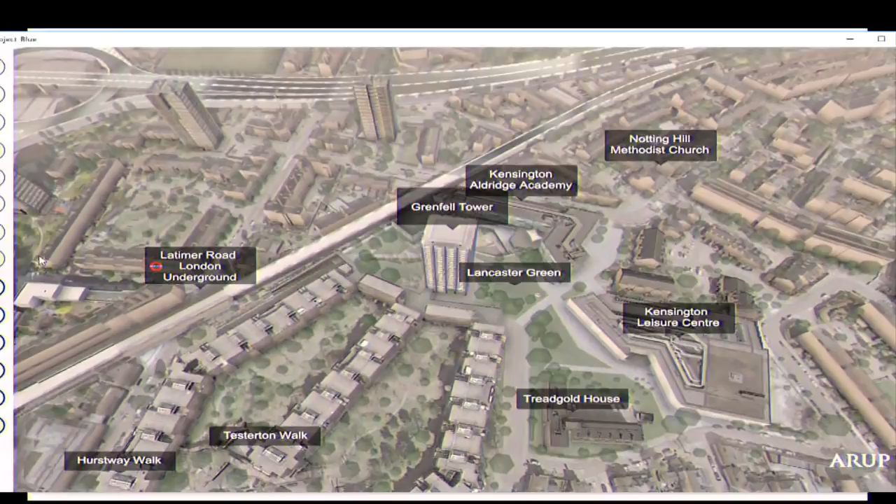That is a plan view of the locality, and just pausing there, you can see Grenfell Tower in the middle, with, to the south, three walkways, and if you start to rotate to the east, you can see Hurstway Walk to the west, Testerton Walk in the middle, and there, just coming into view to the east, is the third walkway, Barandon Walk. The name is just appearing. To the east, we have Treadgold House, sitting on the east side of Grenfell Road, and to the northeast of that, you see there the Kensington Leisure Centre.

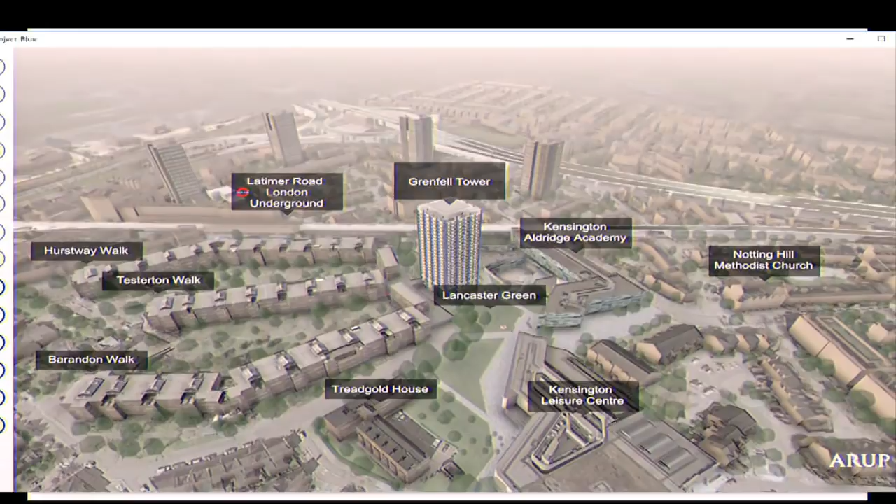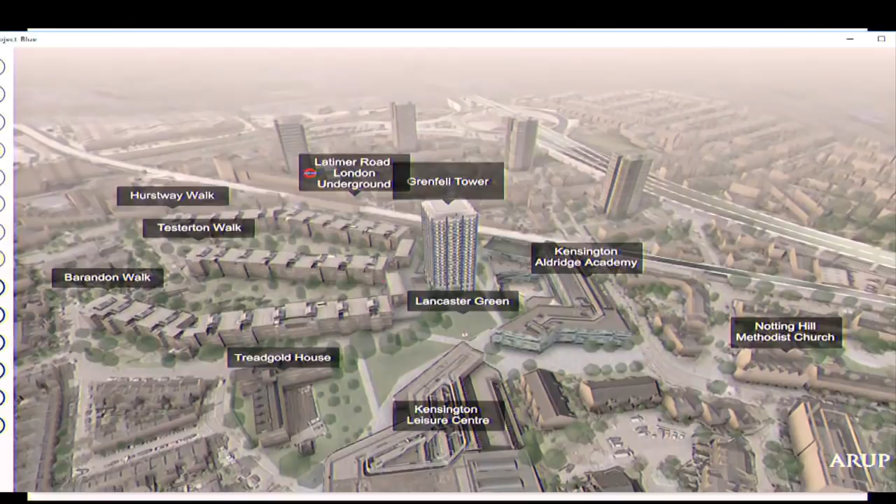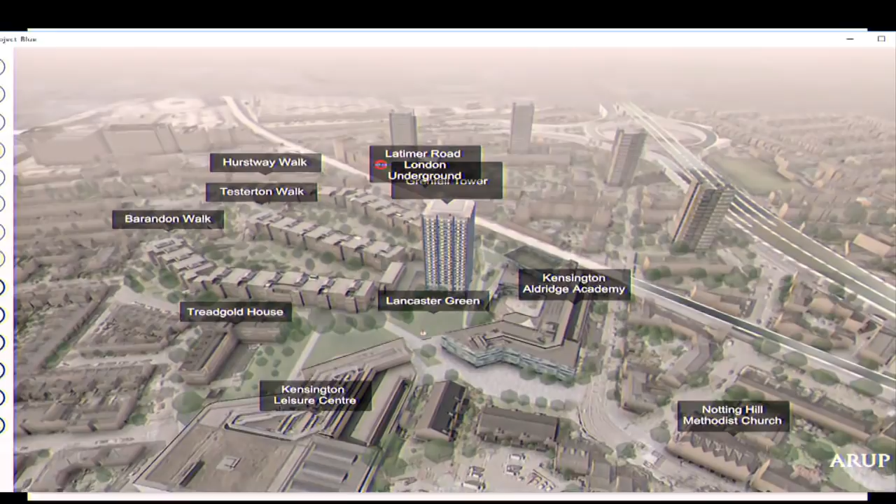To the northwest of that, running from the east, not to the northeast of the building, and running to the northeast, is Kensington Aldridge Academy. And to the immediate east of the building, we have Lancaster Green. You could see the A40 running away there to the west, and the London Tube line with Latimer Road Station to the southwest of the building.

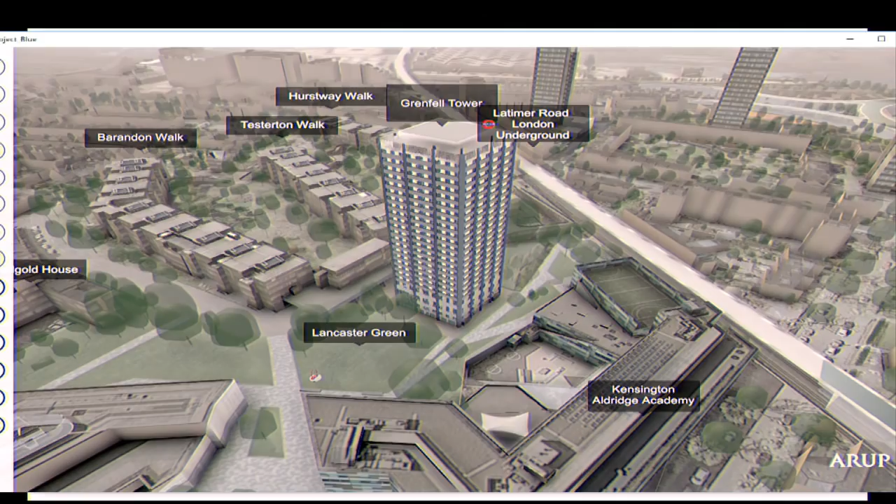If we just pause there, you can see that we're looking at the east face and the north face, and Lancaster Green lies immediately to the building's east. If you pan in just a little bit, please, to the building, you can also see a little bit more detail of the green, which you can see is bedecked with trees, and just to the south and to the southeast of the building, in its southeast corner, is a covered area, sometimes known as the garages, or the walkway roof, as the evidence will sometimes refer to it, which sits at the north end of Barandon Walk and Testerton Walk.

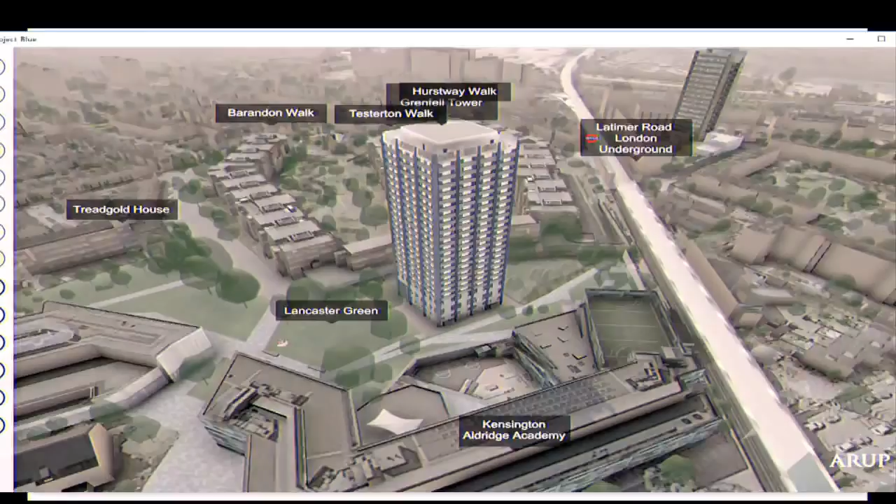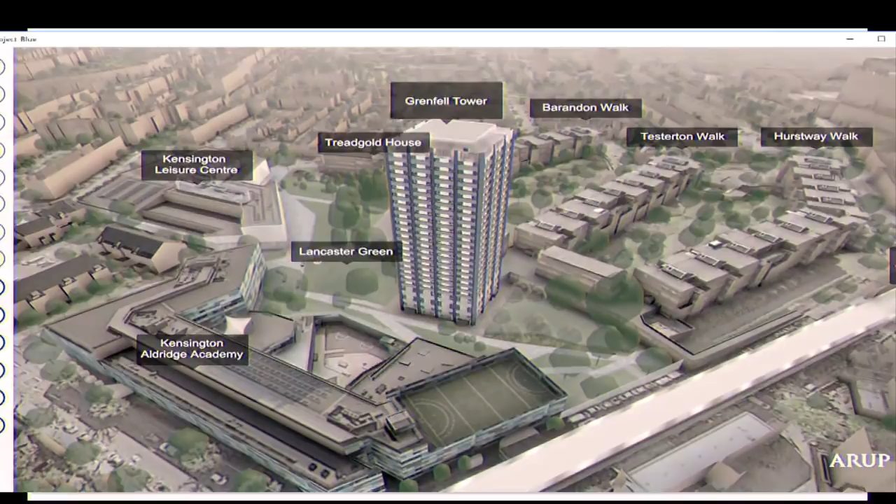If you just pan on round to the north, please, you can see that running to the north of the building from west to east is a pedestrian walkway, which then cuts down southwards, skirting Lancaster Green. Kensington Aldridge Academy, always to the north. And if you move round to the west side of the building, you can see coming into view what isn't in fact on this model, but is a green area with trees, and that is a playground. And as we'll see in a moment, access to the playground is from the ground floor nursery.

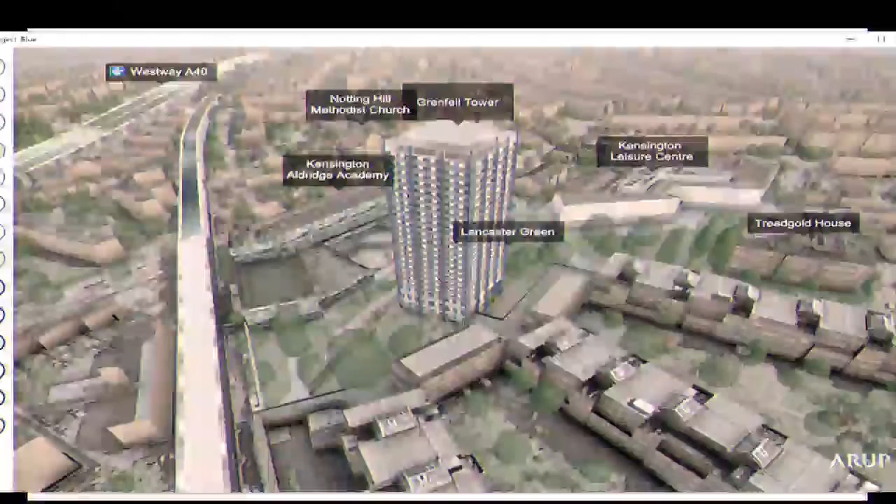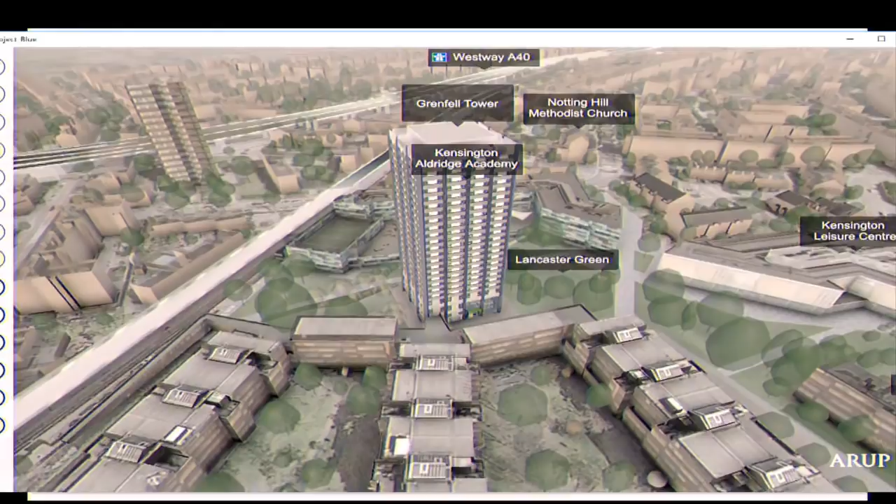If you just please move on round to the west, and then just take me to the southwest corner. I'll just point out a feature of the building which is important, just pausing there. You can see there that on the west face, within the face of the building, are two vertical columns, and on the south face, if you pan to the south, you can see there are three internal vertical columns. The west and east faces had two vertical columns, and the south and north faces had three. Those columns formed an important architectural feature in the geometry of each of the facades, and we will be coming to look at those in a little bit more detail shortly today. If you go to the next section, please.

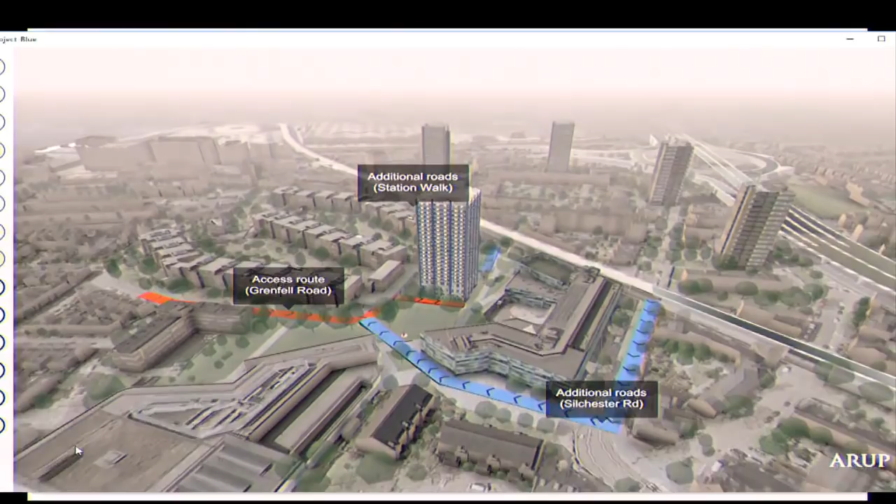So far as access to the tower is concerned, you can see there that the main access, the principal access route, is Grenfell Road, running from the south to the north. And you can see that it performs a left-hand turn running to the east as it tucks in under the roof of the walkway before turning right to bring you immediately outside Grenfell Tower. That was the route that the evidence suggests was taken by the initial pumps arriving on the night of the fire to attend to the incident.

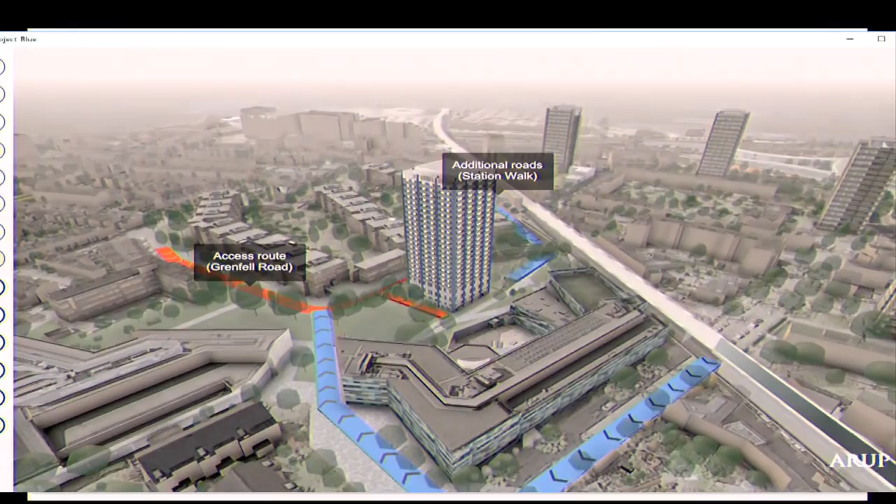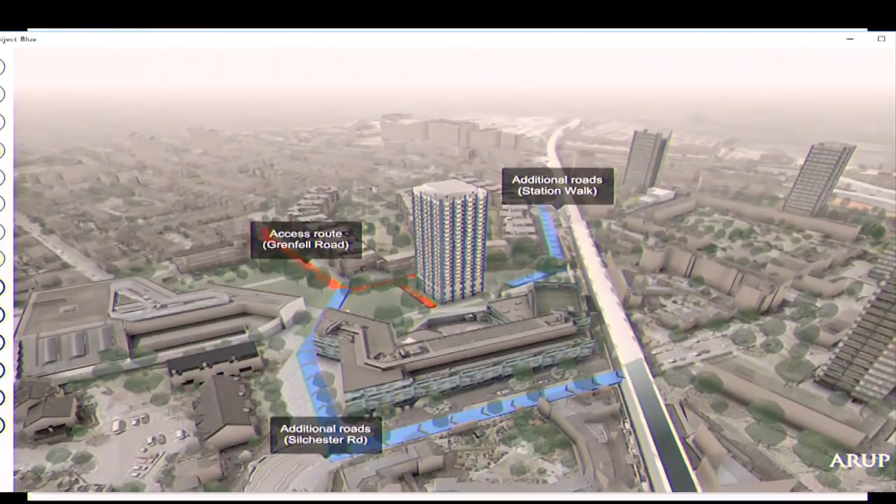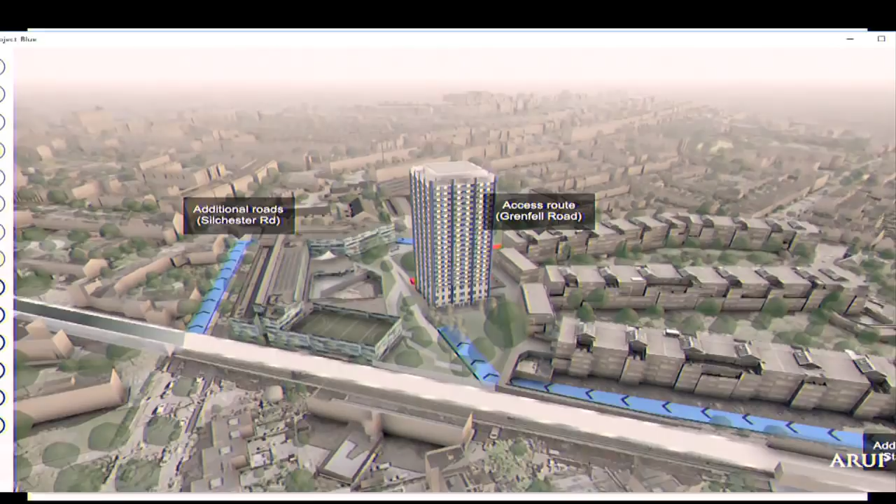There are two other approaches in blue there. Silchester Road, which comes in under the railway tunnel from west to east and then goes south, and Station Walk. Those were not vehicle access routes, at least primarily. And if you just, again, rotate, please, around to the west of the tower, everybody can get a good view of what the principal access route and the secondary access routes were. Thank you. Could you please go to the next section?

Bollards. Bollards feature a little bit in this story, and we thought it right to identify where they were. There are fixed bollards to the southwest of the building, and there are retractable bollards identified in those two locations. If you could just please pan in on those so we see the detail.

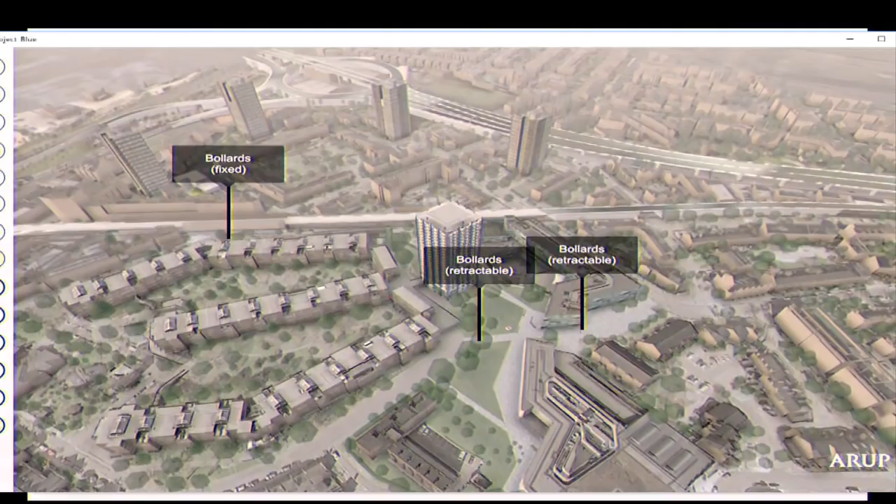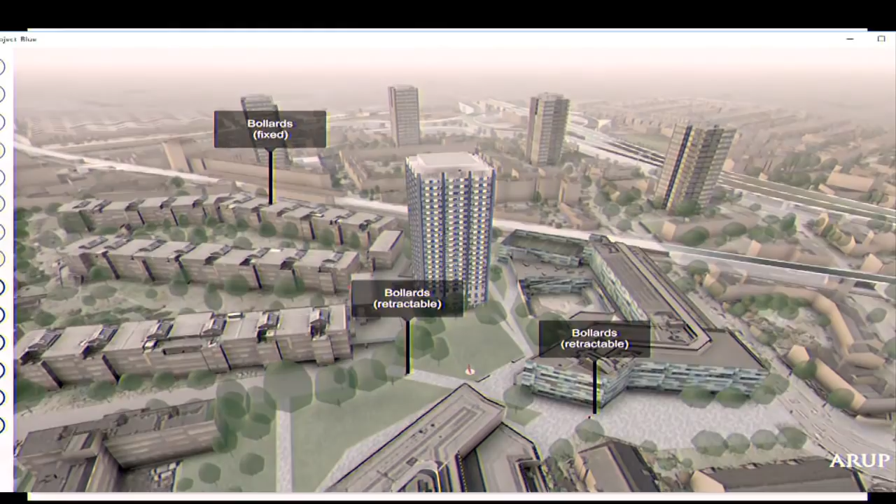They were bollards which would otherwise, if up, have restricted access to the building on the night, but they were retractable, and we will investigate the retraction of those bollards and the time at which they were retracted. If you could please go to the next section.

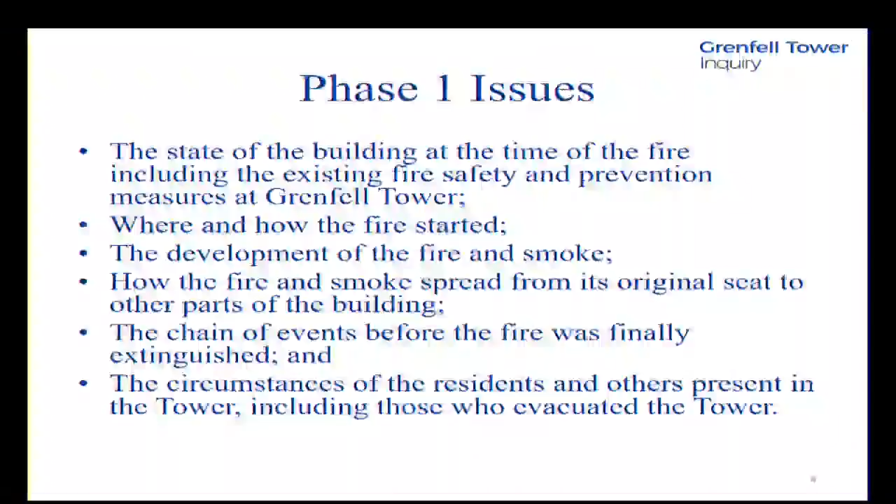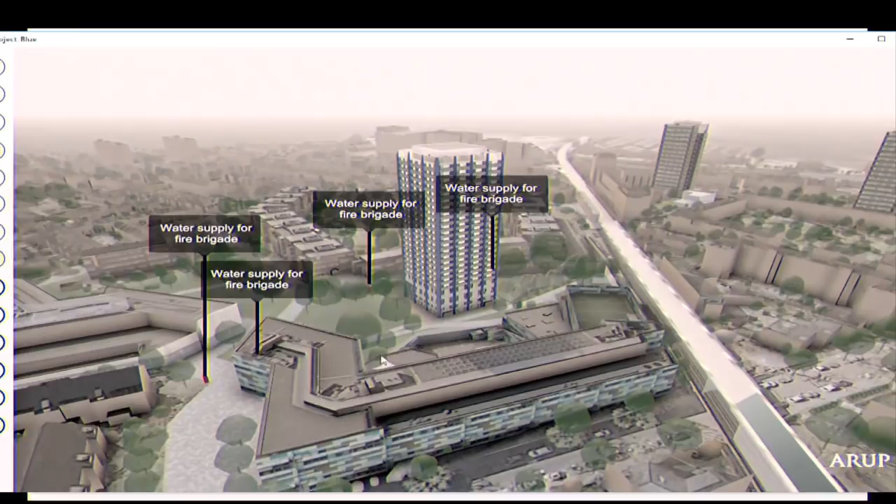And that was the principal fire hydrant utilised on arrival by the LFB, as we understand it, on the night of the fire. And then there is a fourth hydrant to the southwest of the building, indicated there on the right-handmost sign, indicated in red. If you could just pan around again to the west, we could see a 360-degree view of the building in relation to the fire hydrants.

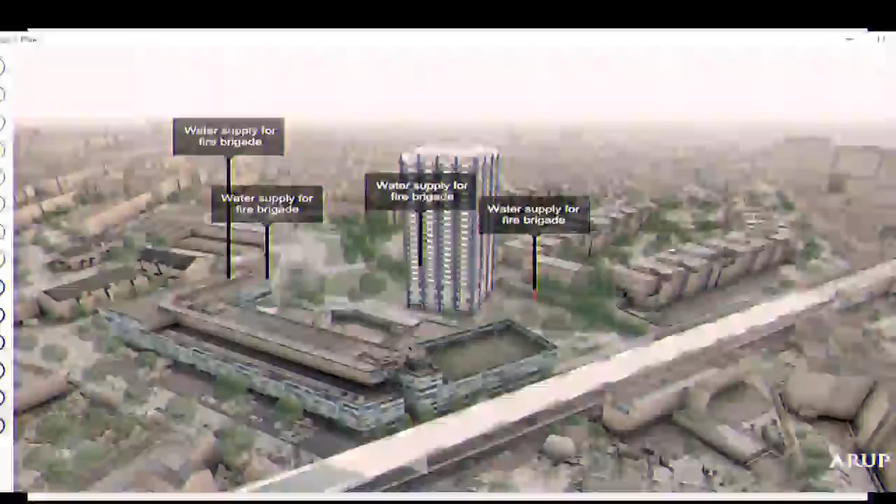And again, I should, when we come to it, note the point that the fire hydrant there to the southwest of the building was close to the dry rising main inlet, which is, as we'll see, to be found on the south of the tower at ground level, just to the left of the main entrance door. I think that'll do. Could we please go to the next section, which is lifts?

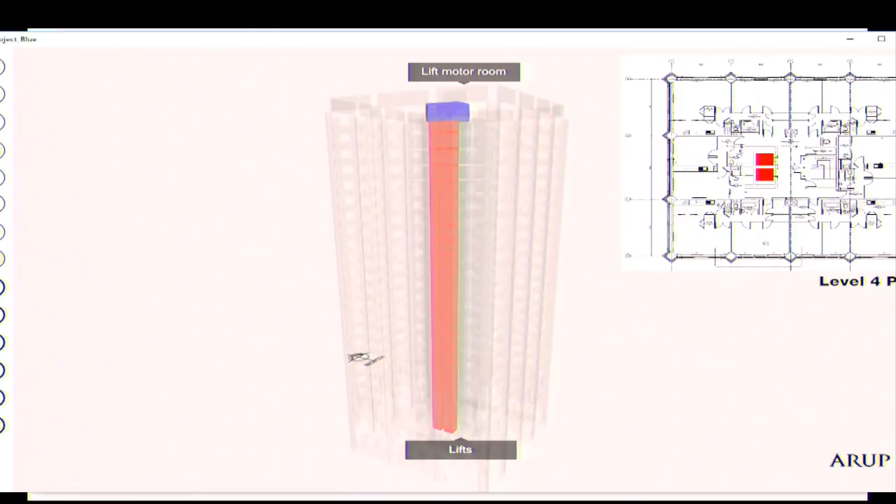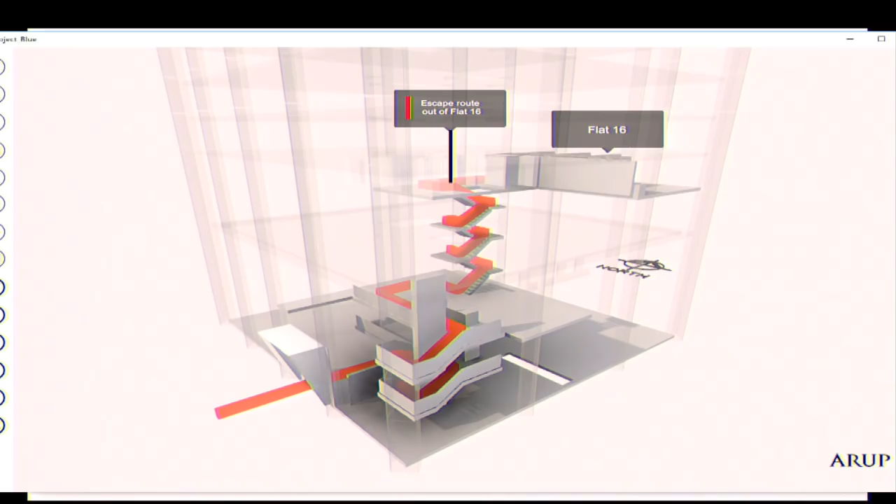Flat 16 and the route out of flat 16. If you just pause there for a moment, you can see the geometry of the staircase approach to and from flat 16. Flat 16, as I've said, lies on the east elevation, occupying essentially the northeast corner of the building on the 4th floor. And there are a number of staircases which one has to go down in order to get out of the building. If I can just go into plan view to start with, and then we'll come back to the 3D view in a moment. That is the plan view.

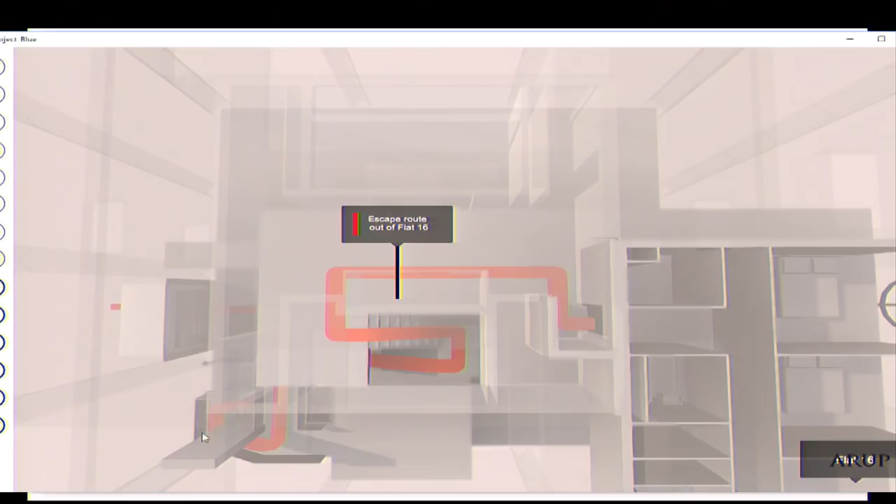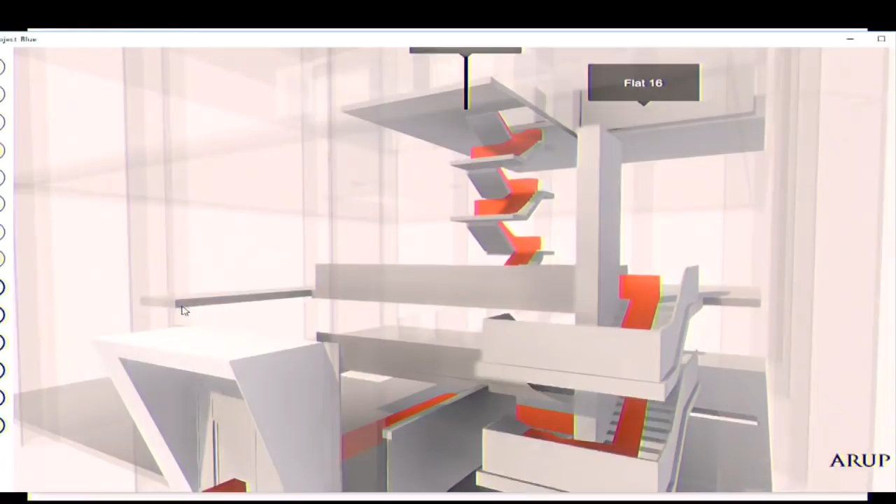And so in order to exit flat 16, the occupants would have had to have left the front door, which you see there on the right, and then gone right, and then immediately left through the lift lobby, left into the stair door, and then left again down the stairs, and then right and down the stairs, and then again down several more flights of stairs to bring one out to level 2, where there is a landing or mezzanine, and then down again several more flights of stairs to bring you out of the exit into the open air through the main entrance to the building.

If I can just ask you to pause there, Connor, would you just identify where the dry rising main inlet is to be found? Yes, it's there to the left of the main entrance. Thank you. Could we now please turn to the next section, which is drawings, and we start with the ground floor. Now, this is the ground floor layout.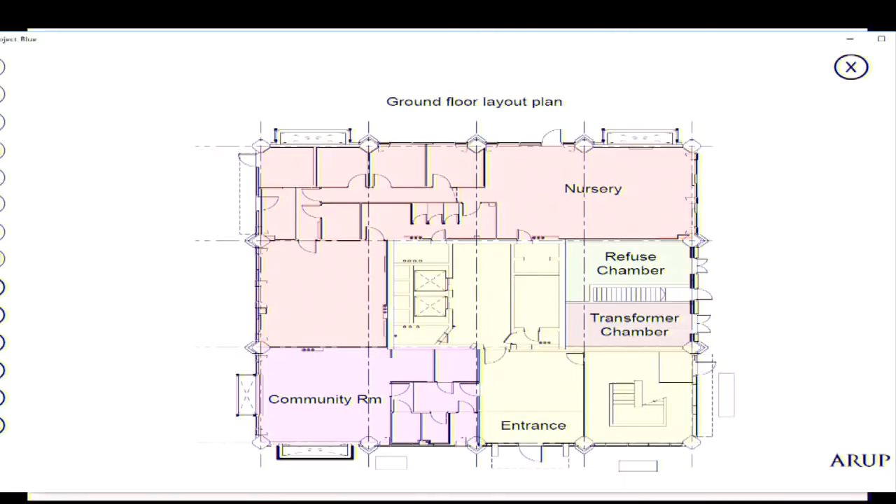You can see the entrance there to the south, and then moving clockwise, going to the west, we have the community room, and then the nursery on the west face, and the whole of the north face. And then moving round in the clockwise direction onto the east face, we have the east windows of the nursery, and then a refuse chamber, a staircase, and the transformer chamber. And then in the far southeast corner, we have the staircase, which we've just seen on the previous part of the model. Could we please see the first floor?

This is the first floor layout plan. Again, moving in a clockwise direction, we start with flat 2, occupying the southwest corner, flat 3 on the west, flat 4 in the northwest, flat 5 in the northeast, and then on the east side there, a community meeting room.

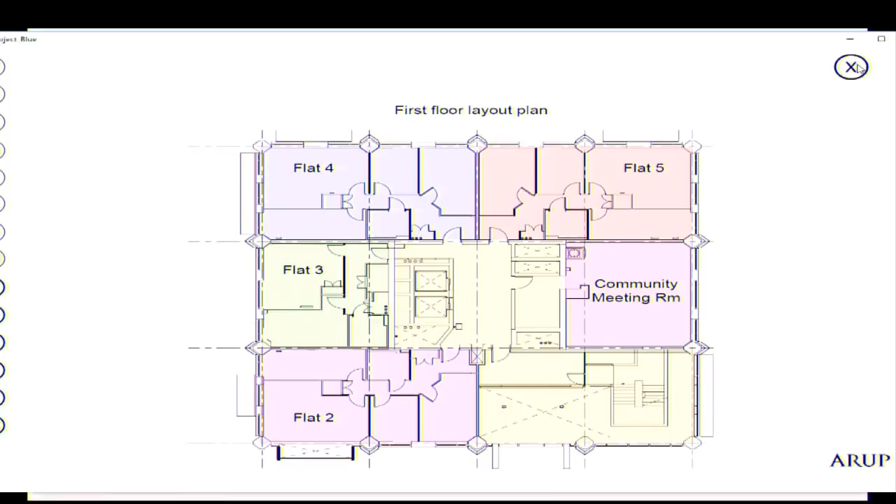And if you could please then go to the third floor layout plan, which we now have, again moving in a clockwise direction. We have from the south flat 8, 9, 10, and 7. Those were new flats as a result of the 2016 refurbishment. 4 flats only on that floor, somewhat larger than the flats that we see from floor 4 to floor 23.

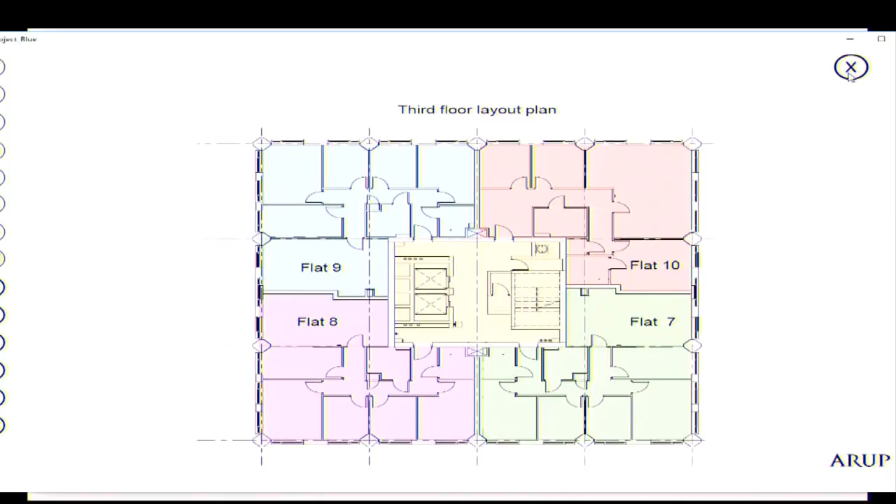And if you could please turn next to the 4th floor. As I say, this is the 4th floor layout plan, which was the same, replicated up the building. I will this time start on the east face with flat 11 being the lowest of the 6 numbers. We have flat 11 on the east side, flat 12 on the southeast, flat 13 on the southwest, flat 14 on the west, flat 15 on the northwest, and flat 16 on the northeast.

And again, just looking at the plan, you'll see that there in the middle are the lift shaft squares and the 2 lifts there on the west side of the lift lobby. And on the east side of the lift lobby, we have the door which goes down the stairs into the stairwell. If you could just identify that with the mouse, that would be helpful. We'll see it again in just a moment a little bit more graphically, but to give you a plan view, that is where the lifts are, that is where the stair door is, to the stairs. And just to the north of that is the refuse room and refuse chute.

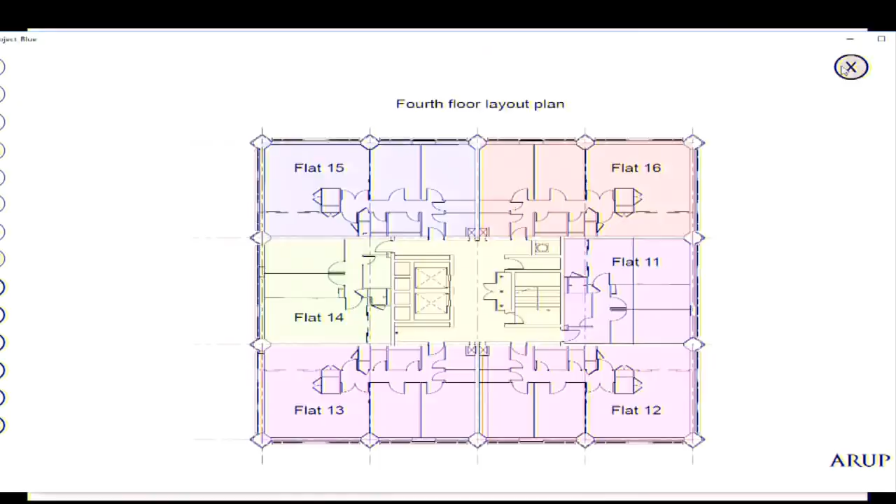If you could please now just go to the next section. This is a 3D model of the plans that we've just seen, and I think I can take these quickly. The intention here is to provide a 3D idea of the various features inside the building. So we start with the building core walls there in grey. The AOV, the automatic opening vents for smoke, has a control box there in yellow, which you can just see there in the main entrance hall on the west wall, just to the north of the grey door. There'll be some evidence about that control box in due course.

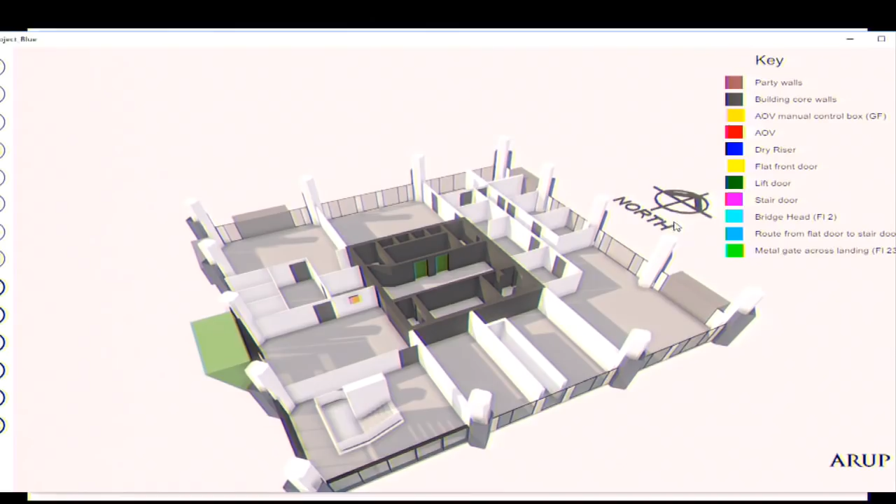Moving on down the key, you can see in green there the ground floor lift doors. And moving on further down, I think that's probably all we need to show you from that floor. If we move to the next floor, floor 1, you can see the stairs on the southeast of the building, to the bottom left-hand corner of the picture, which we saw before, and leading to the landing there, which then comes into the lift lobby.

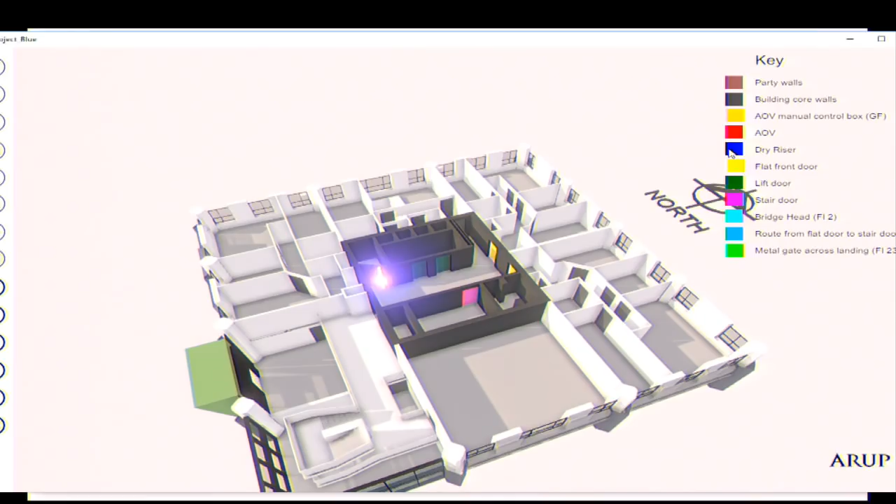Features there are, we have the building core walls there in grey. We have the dry riser outlet, which is where the London Fire Brigade plug their hoses into. And you can see it there, just to the left of the lifts, to the southwest of the lift lobby. And that is replicated on all floors up the building. So it's there. And it's important to remember where that is in comparison with various flats. We have the flat front doors, which are just coming into view there in yellow. The lift doors in green again, and the stair door, which is opposite the lift, just there.

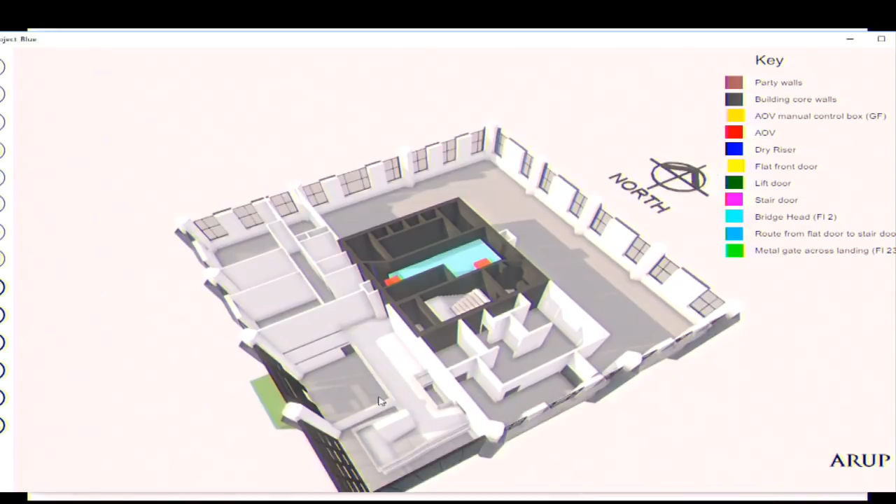If you go to the next level, please, floor 2, this is where the boxing club is, which is the big space to the north and west of the building core. The building core is there in grey. There is a dry riser there as well, which is just illuminated there. We have the stair door as well, which I think, although it's illuminated, isn't showing up. There it is. The stair doors which bring one down.

And in turquoise, a very bright blue, we have the bridgehead. Now, there'll be much evidence about the bridgehead, where it was located, and its various times of movement during the night. It is important that you understand exactly where the bridgehead is located, and it is in the lift lobby there, on the second floor, right in the centre of the building.

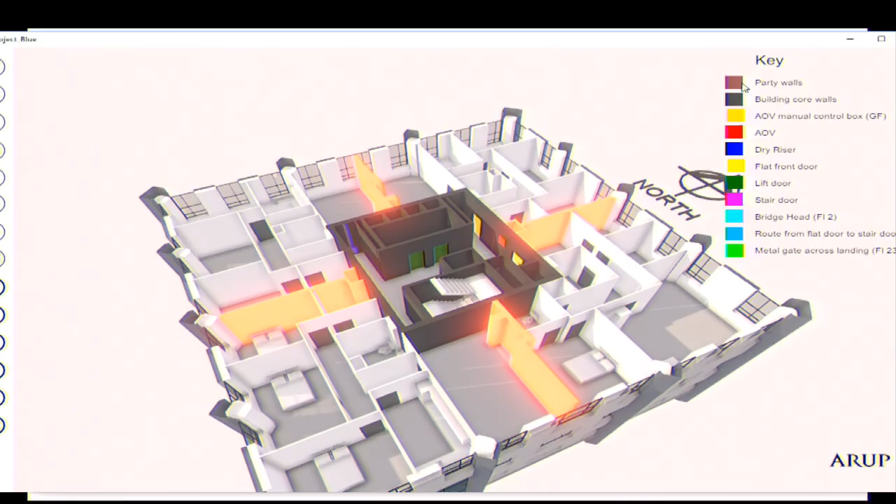If you could then please turn to the next floor. This is floor 3, with the 4 large flats. Again, we've got the party walls there in brown. So that divides off the 4 flats on the 3rd floor. The building core walls there.

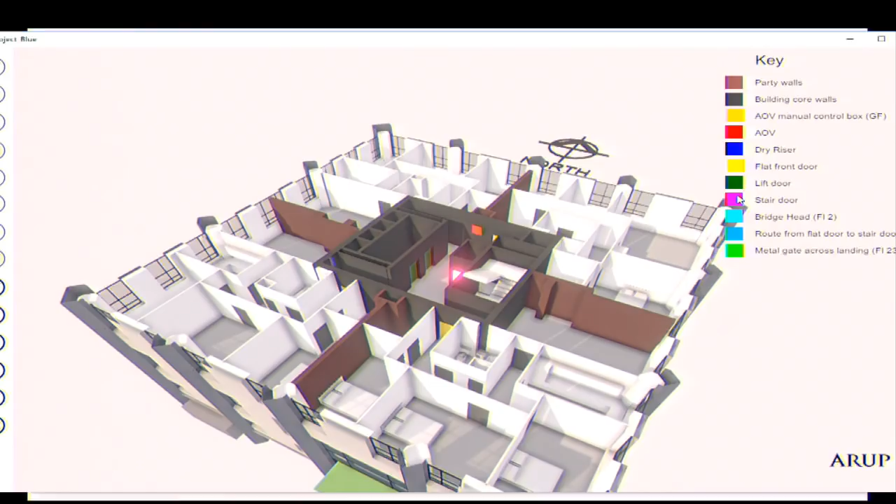We have the dry riser outlet again there in the southwest corner of the lift lobby. We have the lift doors shown in green. We have the stair door there again, and I don't think we illuminated it, but the AOV, the automatic opening vents there on the wall, the smoke vents. And I think that's all we need from that plan.

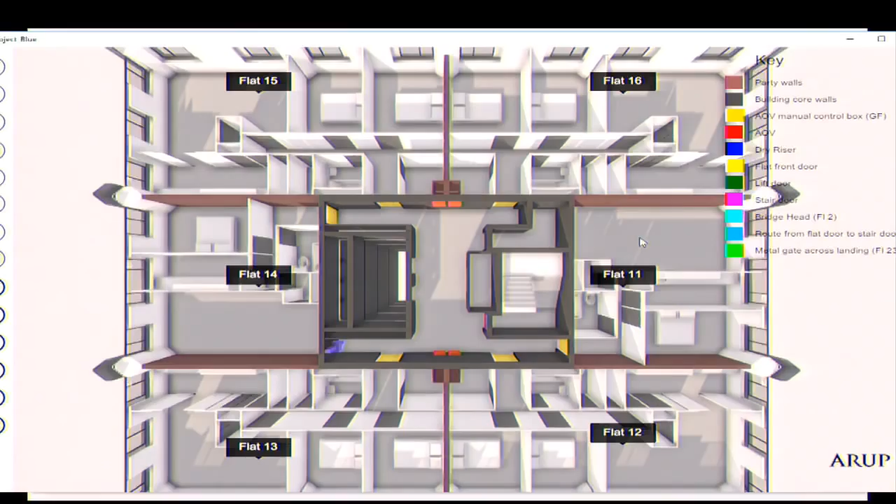And then if we go to the 4th floor, first of all, if we could look at flat 16 in plan, occupying the northeast corner of the building, you can see, as we will come to in much greater detail when we come to the evidence of the occupants, the flat front doors of all of the flats on that floor in yellow, the flat 16 front door in yellow there to the northeast corner of the lift lobby, and you go in and there is immediately opposite you a bedroom.

If we can just identify that with the cursor there. Next to it, a second bedroom. The hallway then runs down past the lavatory and bathroom on the right into an L-shaped living room in the northeast corner, which is then divided off from the kitchen by what are sliding doors, and that is the kitchen space of flat 16 of Grenfell Tower, where the cursor is now.

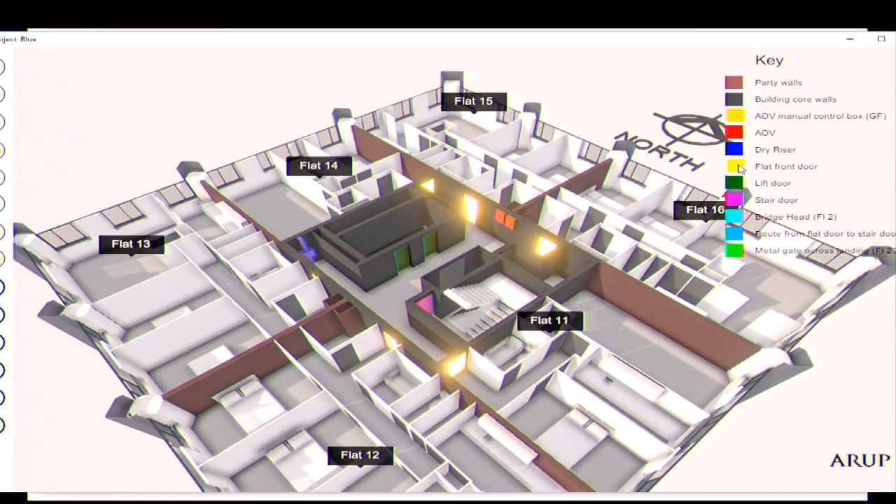If you can now move then into a slightly more angled view so that you can see the other main features for the moment, we can see the AOV on the walls there, just between the doors to flat 16 and flat 15. We can see the dry riser outlet tucked away there in the southwest corner of the lift lobby. We've got the lift doors there in green, and the stair door there in purple or pink, brightly illuminated. And just dwell on that for a moment, if you would, please.

You can see now the route very easily from flat 16, and indeed all the other flats on that floor, and indeed all other floors, which take you to the stair door. And there'll be much evidence about that. In blue, illuminated now, out of the yellow front doors, is the route in blue, which people would have to take from their individual flats to the stair door.

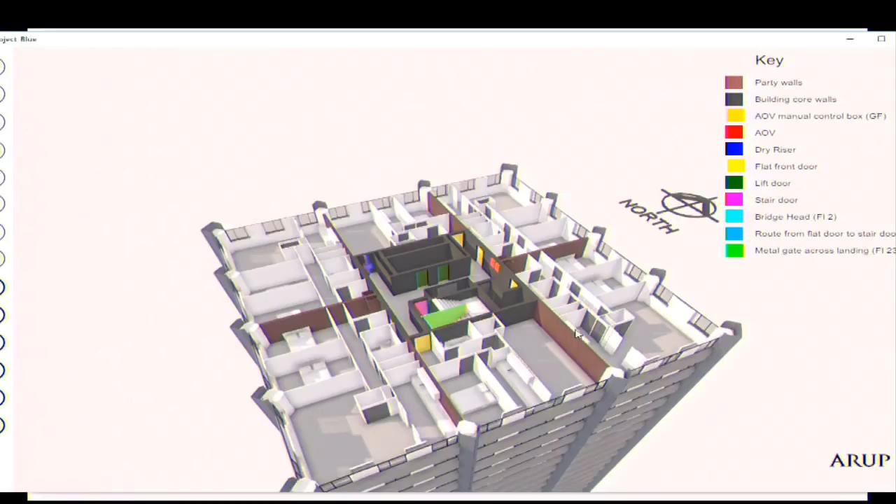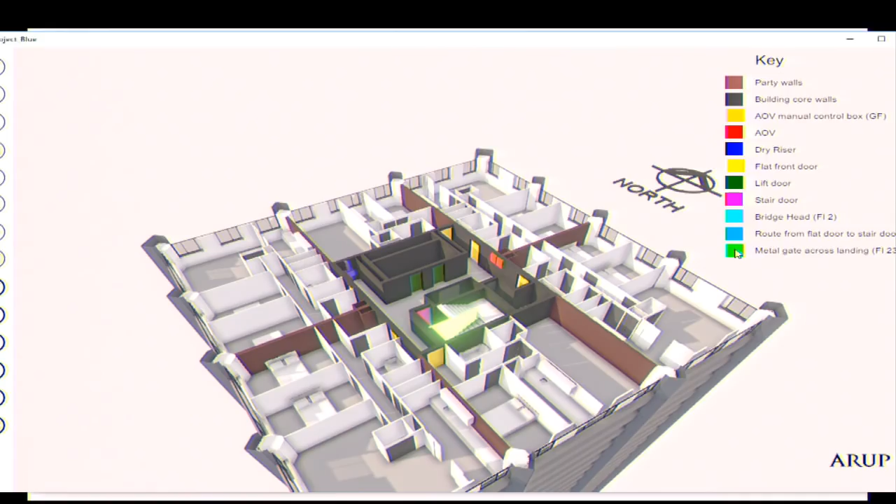If you could now go finally, please, to floor 23. It's exactly the same layout and exactly the same features, except that you will note that there is some evidence that on the landing of floor 23 was a metal gate impeding access to the 24th floor and the roof plant. Thank you very much.

There were also in the building various CCTV cameras. We didn't show them on the model because there is still a little bit of doubt about where precisely they're located. It may not matter. We have 5 in the main entrance, 1 outside the boxing club over the stairs there, 1 in the lobby on level 7, and 1 in one of the lifts.

Mr. Chairman, I'm going to move on now to some detail about the construction of the building, but I'm looking at the clock, and the transcribers have been galloping to keep up with me for the last hour. I wonder whether now may be an appropriate moment for the transcribers' break. Yes, thank you very much. Would 10 minutes be about right? Yes, certainly, Mr. Chairman. I'll rise for 10 minutes. Thank you.

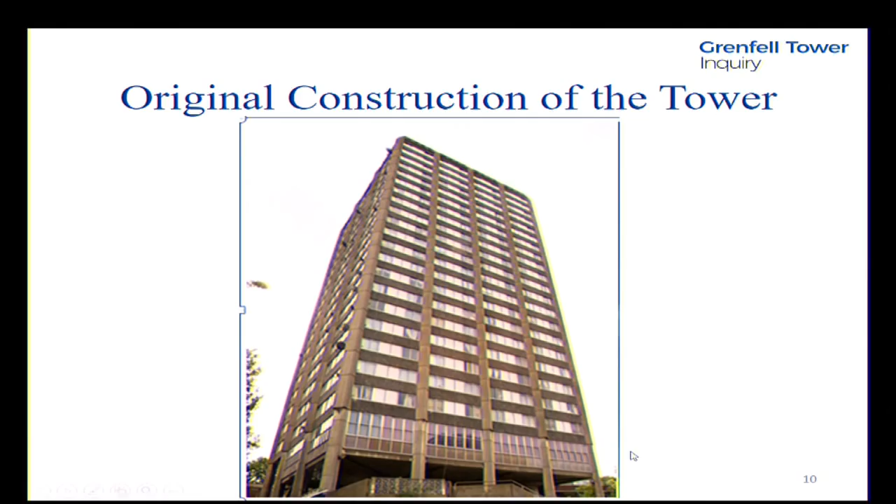To work out which flat numbers are on a given floor, you add 3, the number 3, to the first number or first 2 numbers of the flat. So, for example, flat 16 is on the 4th floor. Adding 3 to the 1 in 16 gives you 4. And it's the 6th flat, flat 6, on the 4th floor. Flat 26 is on the 5th floor, flat 6. And flat 195 is on the 22nd floor, flat 5.

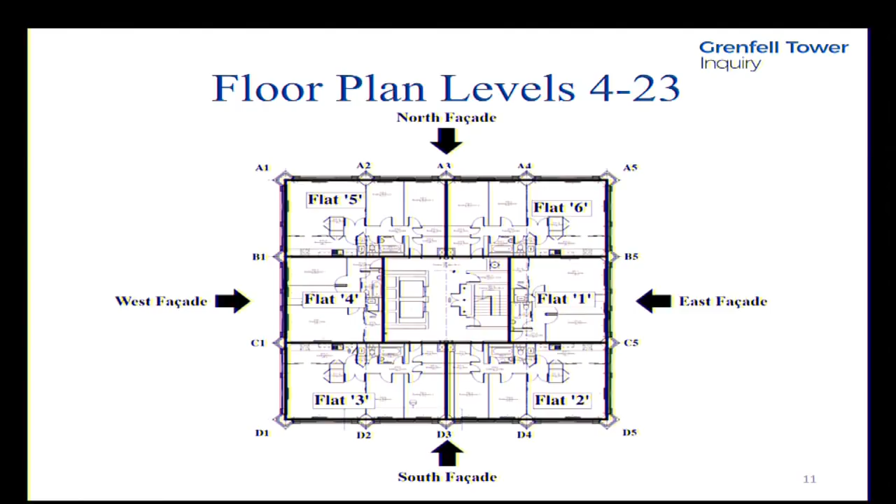Now, this was a substantial refurbishment. Planning permission was sought first in 2012, and an initial lead contractor, Leadbitter, was appointed. However, after a further procurement process, Rydon Maintenance Limited was eventually appointed the design and build contractor in June 2014. The architect for the 2012 to 2016 refurbishment was Studio E. The employer's agent and quantity surveyor was Artelia Projects UK Limited. Specialist fire engineering advice was provided by Exova Warringtonfire.

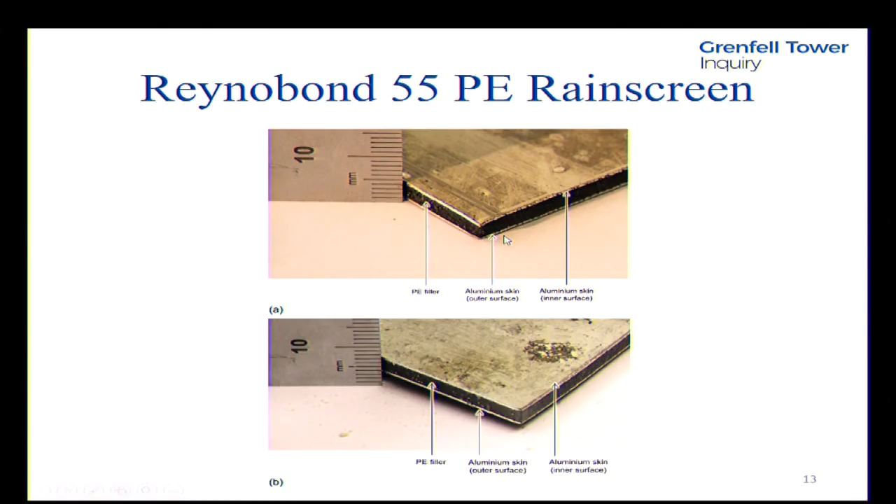Now, polyethylene is a combustible synthetic thermoplastic polymer which melts and drips upon exposure to heat, and which can also flow whilst burning. It has a high calorific value as compared with other common construction materials, and it will provide a fuel source for a growing and spreading fire. It melts at 130 to 135 degrees centigrade, and it ignites at 377 degrees centigrade or so.

These aluminium composite panels, ACPs, covered the face of the building where they were hung onto rails as spandrel panels moving horizontally, and were also present on the columns of the buildings, as we've seen. There were also fins of ACP around the top of the building, as you can see there, where the cursor is, which created an architectural crown.

Now, this ACP rain screen outer layer was on the exterior of the building between levels 4 and 23. It was manufactured by Arconic Architectural Products, and it was fabricated for specific use at Grenfell Tower by CEP Architectural Facades, who cut it and shaped it for application on the building. According to Arconic's opening submissions, they accept that this product was not of limited combustibility for the purposes of the building regulations, and their position is that this should have been obvious to any construction professional.

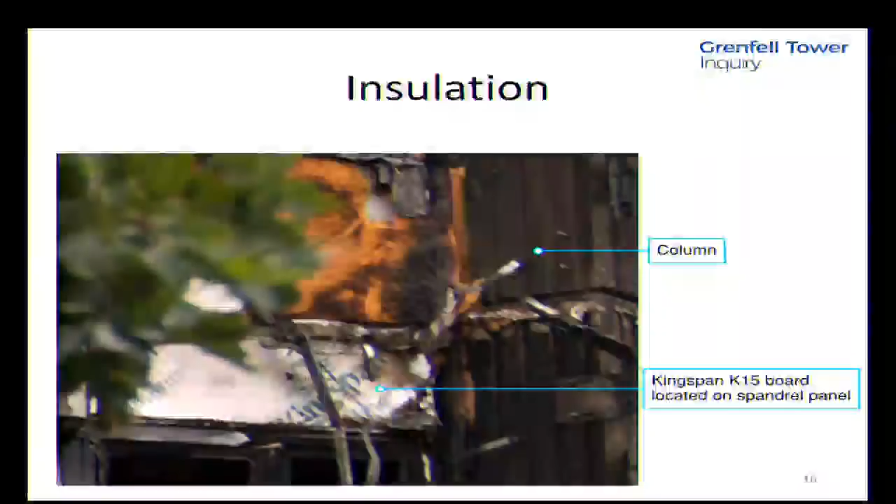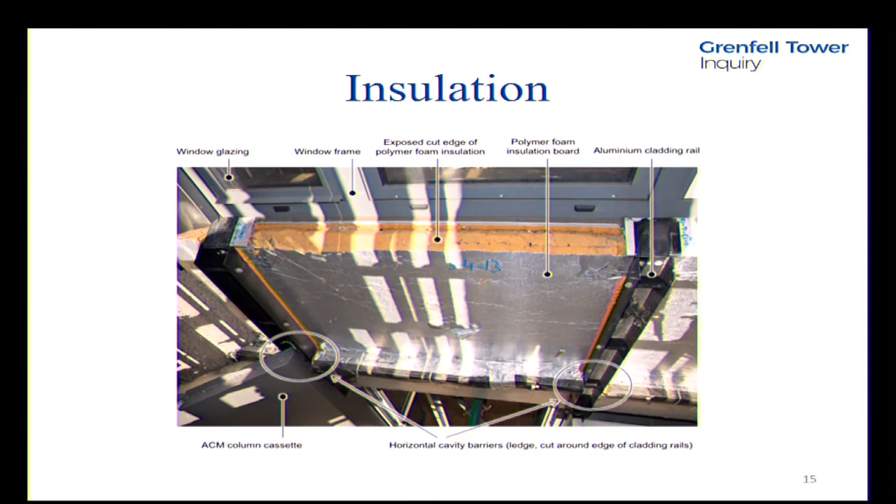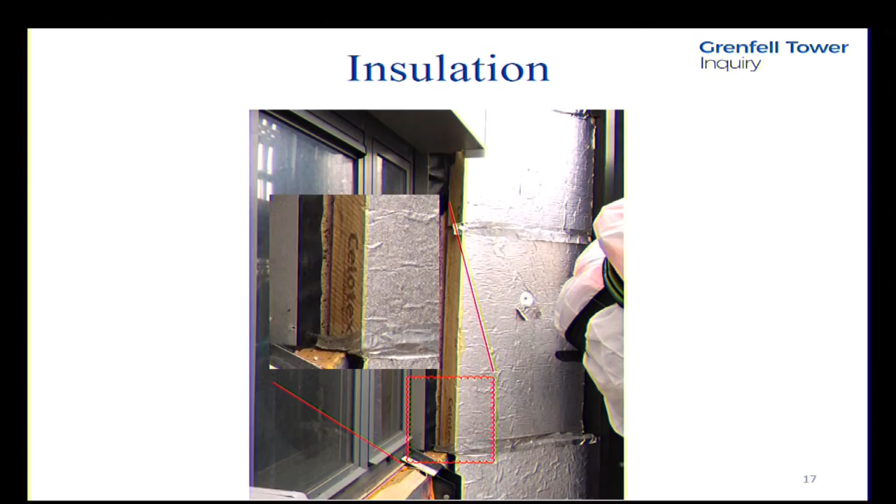Now, PIR has an ignition point of 306 to 377 degrees centigrade, but a low thermal inertia. As Professor Bisby explains, what this means is that PIR has a comparatively low time to ignition, and it can support rapid fire spread of adjacent materials because it effectively insulates the cavity from heat loss. As to Kingspan K15 phenolic, it seems that this accounted for a relatively small percentage of the cladding surface area compared to the Celotex RS5000 product. And further investigations are continuing by the inquiry team.

Present in the facade system were also a number of open cavities, some of which were significant in terms of their size and their location. This is a topic to which I will return later in my opening address when I summarize the main hypotheses which are beginning now to emerge from the expert evidence. However, it should be noted that some cavity barriers had been installed in the facade system, both in the horizontal and in the vertical orientation.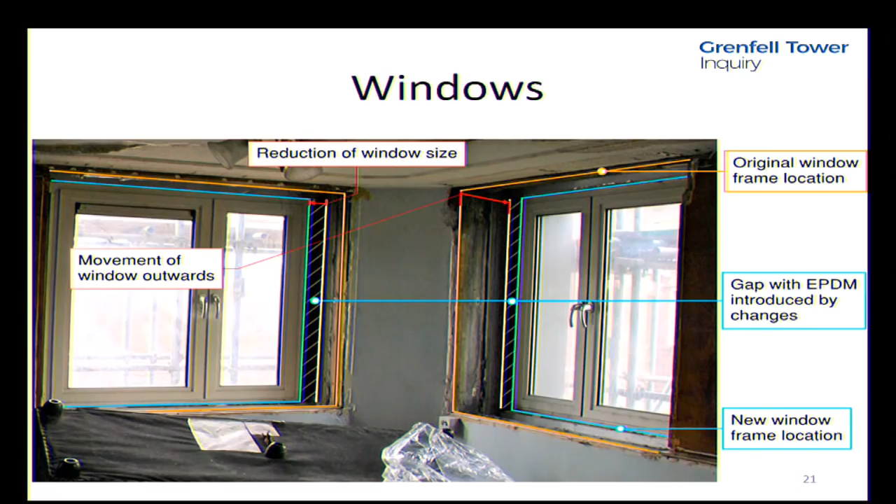The changes created a gap that you can see between the concrete and the facade system. And you can see that the gap was filled there with EPDM, a polymer product. You can also see from this that the windows had been moved outwards to sit within the cladding system. And then the gap, as we'll see in a moment, was covered with UPVC, or unplasticized polyvinyl chloride, a solid combustible plastic. And that is what the windows look like after completion of the refurbishment.

You can see the new window jamb in yellow on the vertical sides of each of the sides of the window. You can see a new windowsill in UPVC finish, and the window header also had a UPVC finish. And then sitting in front of the window frame, running along the ceiling, was the original Purlboard ceiling filler strip. I'll come back to Purlboard in just a moment, but just note it there at the window header for the time being.

So far as UPVC is concerned, it is combustible and it deforms at relatively low temperatures, 75 to 100 degrees. Now the UPVC appeared to have been glued on to 25mm PIR insulation material, manufactured either by Celotex or by Kingspan. They were either Celotex TB4000 or Kingspan Thermapitch TP10. Now PIR, I've already mentioned, polyisocyanurate, a rigid plastic foam. It is combustible. This particular product was much thinner than that which was used for the cladding affixed to the external concrete.

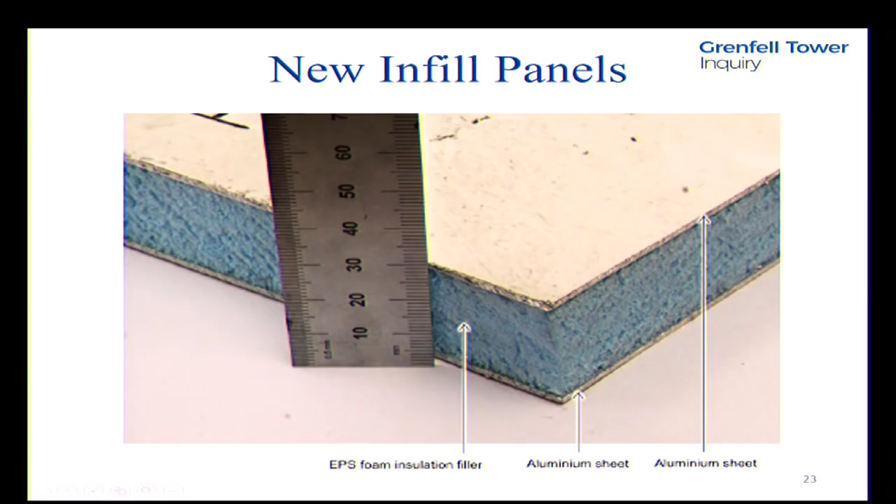Aluglaze is a product comprising an insulating core of 25 millimeters of styrofoam, which is expanded polystyrene. And you can see it on this slide in blue. It's the blue insulation filler, sandwiched between aluminium panels of 1.5 millimeters thickness. Styrofoam is combustible. It ignites at 356 degrees centigrade.

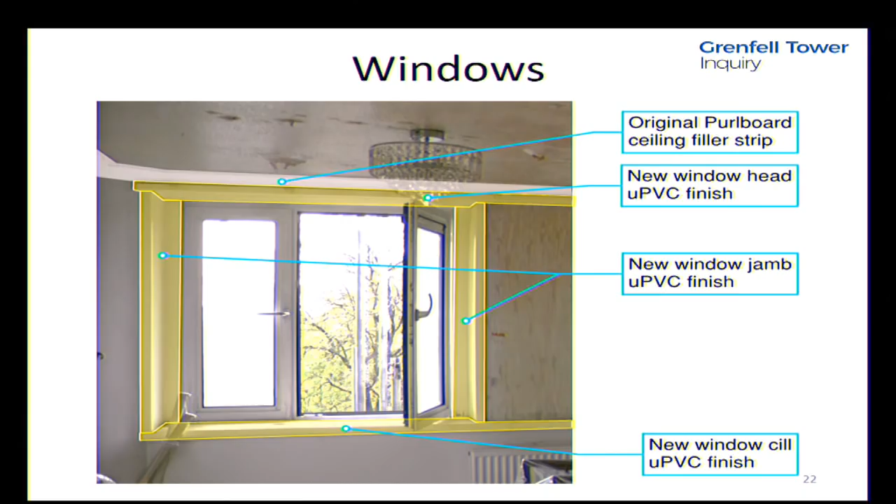Internally, above the windows, go back to that slide. Internally, above the windows and in a band around the perimeter of the ceilings, which we've just seen, was a strip of original insulation board which was left in place during the refurbishment works. It's believed to be a polyurethane foam called Purlboard. Polyurethane, or PU, is a rigid combustible plastic with an ignition temperature of 356 degrees centigrade. And there it is on this slide.

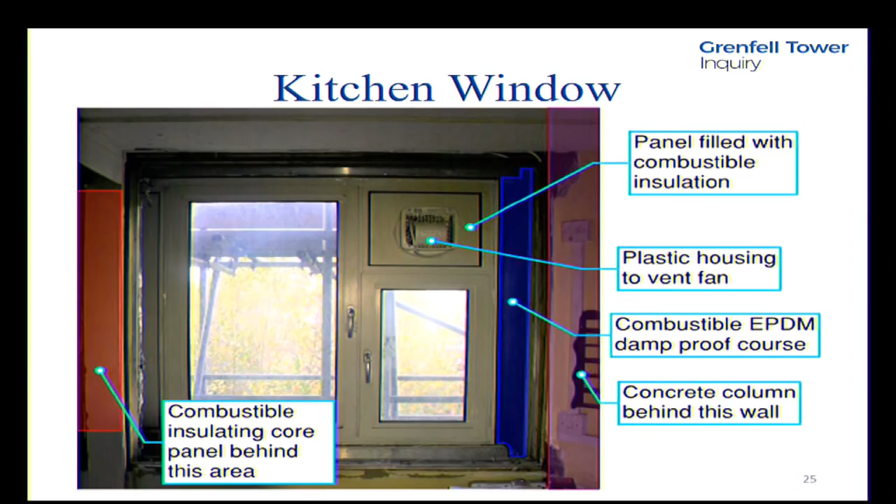In terms of the history of the building, there are two other major works which were carried out at the tower, which were separate from the 2012 to 2016 refurbishment, which are of key relevance to our investigation into the condition of the building on the night of the fire. Those major works are, first, the flat entrance fire door replacement works, which took place in 2011 from levels 4 to 23 inclusive. This was a program of works which were intended to replace 106 flat entrance doors with fire doors which complied with relevant fire safety standards.

Secondly, the gas supply works which took place between October 2016 and June 2017. This new tenant gas supply was required because of corrosion within one of the existing gas risers, which had led to a small gas leak in September 2016. The gas works were unfinished at the time of the fire in June 2017.

Dr. Lane will be giving a detailed presentation about the history of the building, including the major refurbishment works and the building more generally, in her presentation the week after next to set the scene for Phase 1. I now come to the next section of this introduction, which is the active and passive fire safety systems relevant to Grenfell Tower.

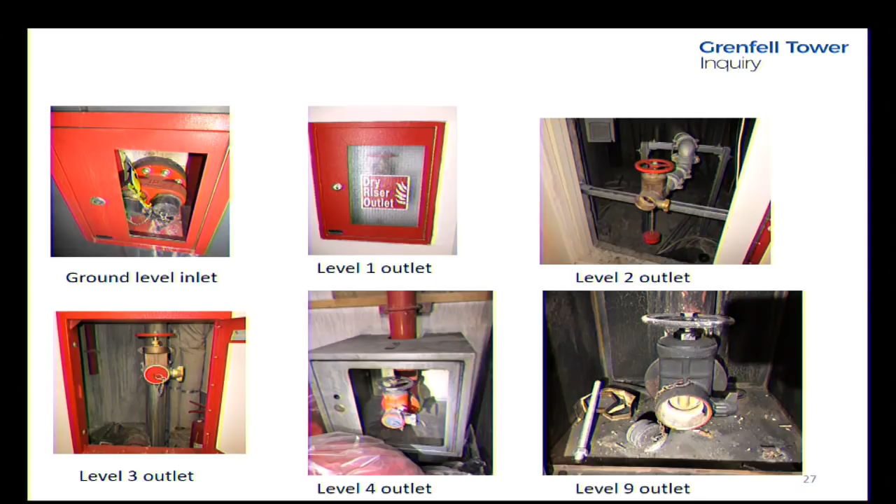As I will outline later on in this opening, Dr. Lane has evaluated the performance of these active and passive safety systems on the night of the fire, and she'll be giving oral evidence on those matters in the latter part of Phase 1, once we have heard the evidence from the firefighters, the survivors of the fire, and the bereaved. And I now turn to the events of the night of June the 14th, 2017.

It is Dr. Lane's preliminary opinion as follows. The events that unfolded at Grenfell Tower on the 14th of June 2017 rapidly became unprecedented. Rather than a fire within one internal compartment, a major fire in the building envelope occurred, and this itself was on multiple stories and across multiple compartments. Additionally, there were very many post-flashover fires internally in multiple compartments on multiple stories.

The building envelope itself was therefore a major hazard on the night of the fire. The active and passive fire protection measures within the Grenfell Tower were required to mitigate an extraordinary event, and as a result, the consequences were catastrophic.

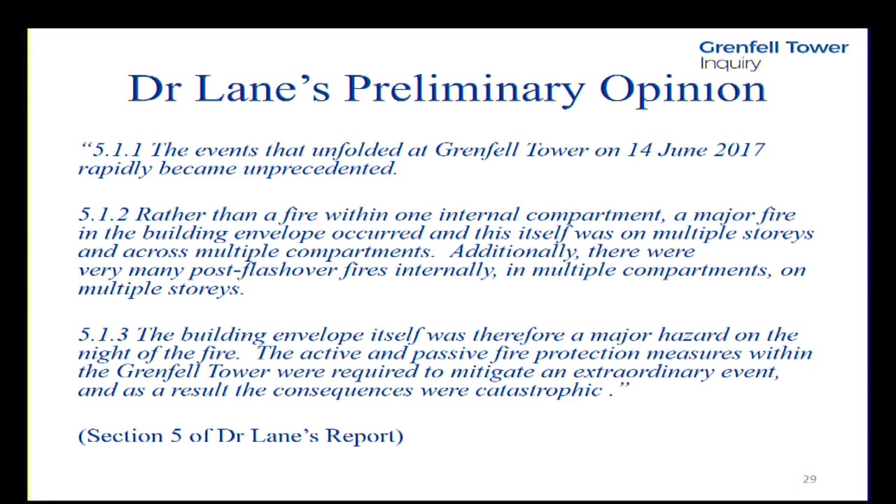Turning to the fire within flat 16, Professor Niamh Nic Daeid's clear preliminary view is that the fire started in the kitchen of flat 16 on the 4th floor. That view is shared by the forensic examiners retained by the police who carried out an examination of flat 16 in the immediate aftermath of the fire.

This on the screen is a floor plan of flat 16, which includes the kitchen in the bottom right-hand corner. This is a figure taken from Professor Niamh Nic Daeid's report, figure 12. We know that the flat is on the northeast corner. We have the front entrance there at the bottom of the picture. We have a storage cupboard to the left as you go in, and then the hallway. Crossing the hallway, moving north, you go into bedroom 1. Bedroom 1 was occupied by a lady called Almaz Kinfu.

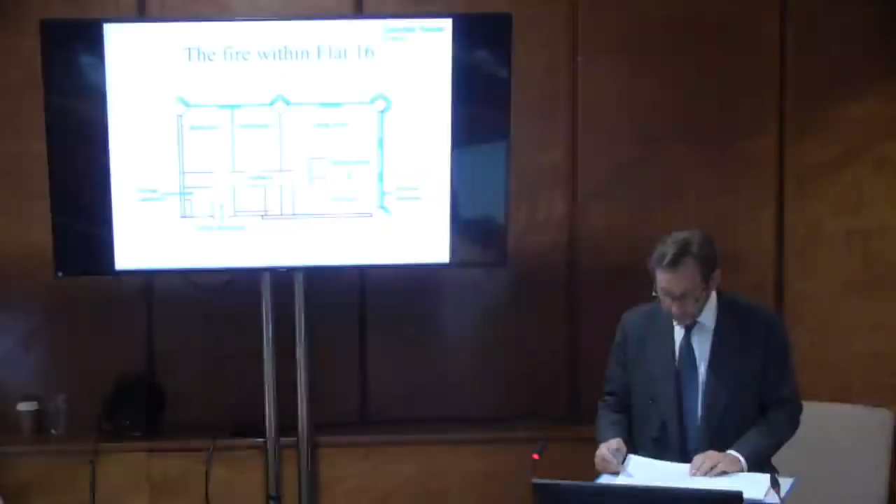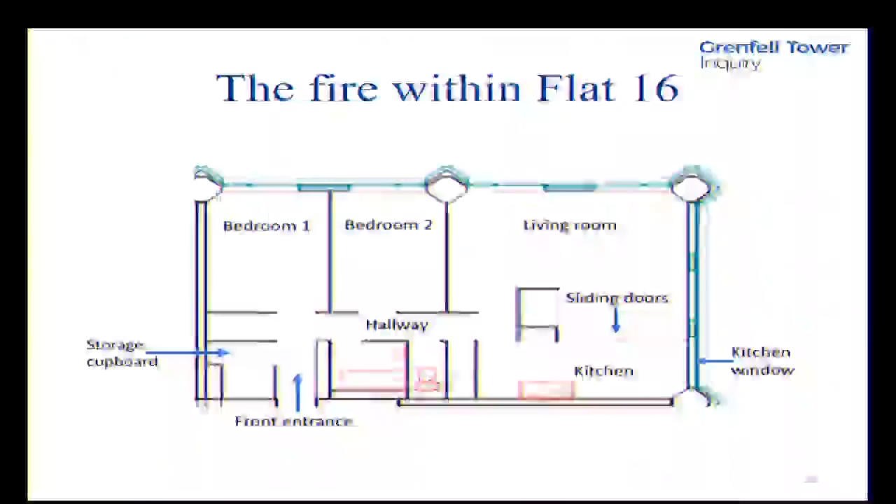Next to it was a second bedroom, occupied by a lady called Elsa Afewerki. Moving down the hallway, to the right there is a bathroom, and beyond that, a lavatory. And then at the end of the hall, to the left, you enter the living room, which is an L-shaped room, which has sliding doors to the south. And then in the far southeast corner of the flat, the kitchen. The kitchen is divided from the living room itself by sliding doors.

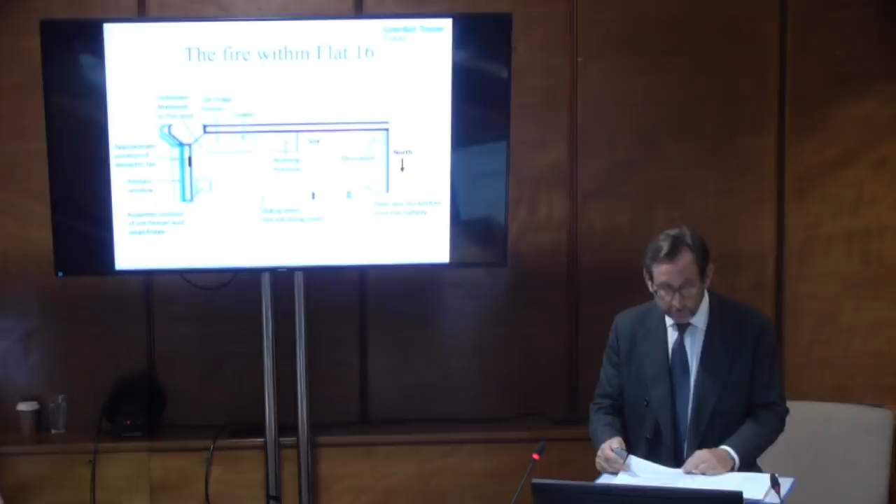From the door on the bottom right-hand side of the slide, the door opens from left to right, and you enter straight into the kitchen from the hallway. Immediately opposite you, there is a microwave. To the left of that, a sink, and then a washing machine, and then a cooker, and then next to the cooker, nearer the window, the tall fridge freezer. There is then a gap where unknown materials were, and there'll be some evidence about that, we anticipate.

And then you have the window and the approximate position of the extractor fan, remembering what we saw earlier about precisely where the extractor fan was positioned within a combustible panel. And then the assumed position of an old freezer and a small fridge perhaps on top of the old freezer.

Precisely how these were laid out will be the subject of further evidence about flat 16, which is to come. In Professor Niamh Nic Daéid's view, the evidence thus far suggests that it is more likely than not that the area of origin of the fire was in or around the tall fridge freezer in the southeastern part of the kitchen within flat 16. The area of origin includes the area between the tall fridge freezer and the window.

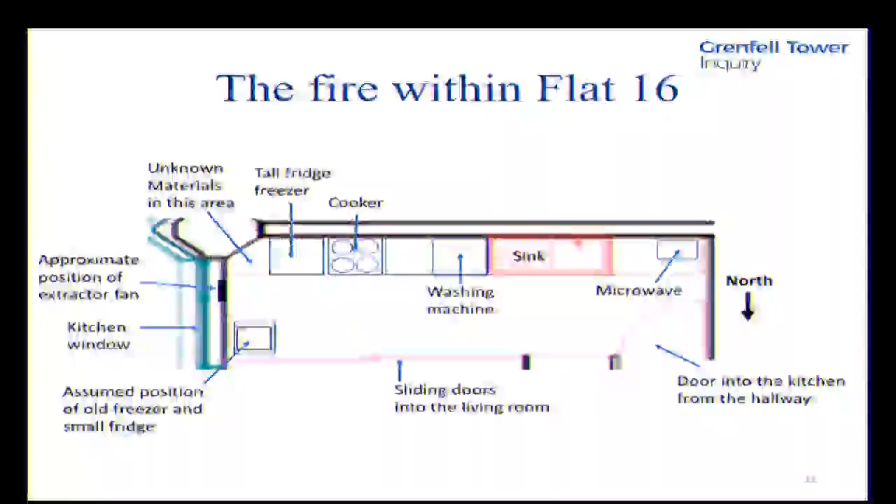Now, Mr. Chairman, I've reached this point a little bit earlier than I was otherwise going to. The reason I've stopped short is this. I'm now going to be showing some still photographs and then a lengthy video piece of some 12 minutes showing the building on fire on the night. Now, anybody who thinks they might find these images distressing, as they might, should leave the room. And I was going to suggest that we take perhaps a short break now and come to it. The video itself is not immediately following, but there are pictures which people might find distressing.

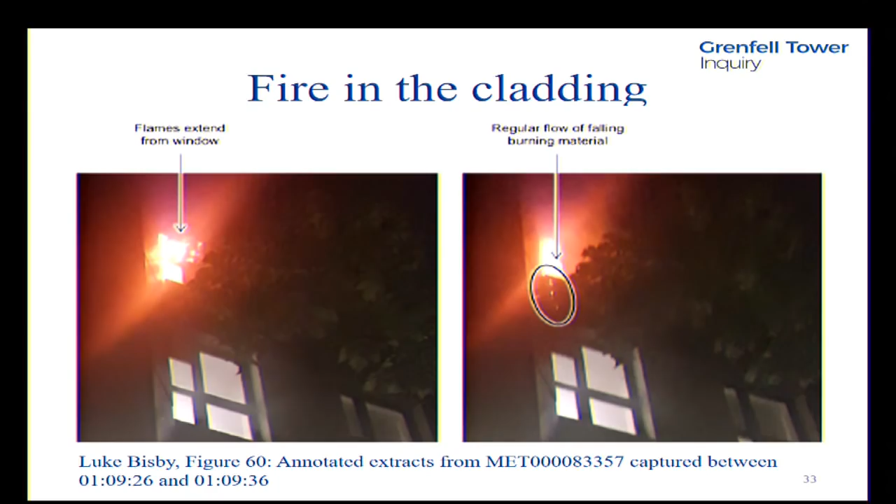Thank you very much. Here is a photograph taken of the fire in the cladding, and you'll note that the capture of that photograph is between 01:09:26 and 01:09:36. It comes from Professor Bisby's report at figure 60. And you can see that Professor Bisby has identified that at this stage flames were extending from the window on the exterior and that there was a regular flow of falling, burning material.

Precisely what happened in the kitchen to get the fire to the combustible materials around the window set and to ignite them is not yet known. The science of the heat and fire spread which would permit ignition of these materials is covered in detail in Professor Torero's Phase 1 report. It will be explored with him in detail when he gives evidence. The inquiry will use its very best endeavours to assist the chairman to determine the cause and origin of this catastrophic fire that consumed the tower.

In many respects, however, the cause and origin may not be of primary importance. While that is a question the inquiry will strive to answer, an even more pressing question from the perspective of the public interest and public safety lies in the question of how the fire penetrated the exterior envelope of the building and thereafter spread so rapidly and so ferociously up and around the exterior and back into the building.